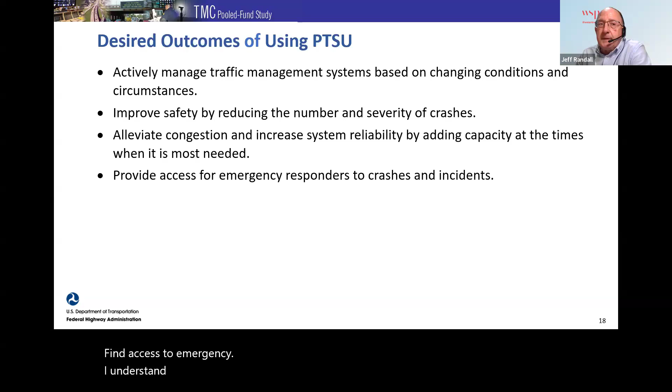Some key considerations when planning and implementing can include policies, procedures, and staff resources to support active traffic management and operations of PTSU. Operations staffing and scheduling to enable and operate the PTSU, operator position knowledge, skills, abilities, and operator descriptions needed to manage the part-time shoulder use operations. Next slide.

Agencies are challenged with a number of things when implementing it. Some benefits may vary from site to site, and it's really based on driver awareness of reasons to use the shoulder, driver behavior, and road geometry can impede that. Part-time shoulder use compliance may be low if restricted use is not enforceable. PTSU requires significant investment in field devices, traffic management system capabilities, staff, and support resources. Implementation may involve agency policy changes, operating procedural changes, additional staffing, and additional training for operator skills.

Next slide, please, Jordan. The engine that drives the operation and management of part-time shoulder use is the TMS. The TMS needs to have the capabilities and resources to support actively managing and operating the use of part-time shoulder use, performing functions including collecting and processing data, disseminating the information to travelers, emergency responders, and service providers, ensuring the shoulder is clear of obstructions prior to opening and while it's open, and monitoring the shoulder in real time.

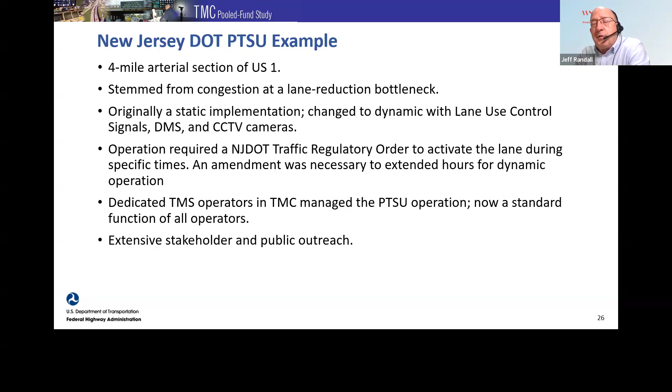Operation required a New Jersey DOT traffic regulatory order to implement PTSU. An amendment was necessary later to extend the hours when it went to dynamic operation. There were dedicated operators within the TMC initially that managed the operation, but now it's a function and role of all operators. They used extensive stakeholder and public outreach before the first implementation of the PTSU.

Michigan implemented PTSU along US 23 in Ann Arbor because they needed additional capacity during peak hours and special events. It did not require any policy or staffing changes when implemented.

Existing on-road maintenance personnel are used to sweep the shoulders to verify if there are any obstacles present, which might restrict use of the shoulders for traffic lanes. One challenge they experienced, as a northern state, was the timing of de-icing applications required for traffic to activate that. I think Chris will likely talk more about that.

Sorry, Chris, you're New Jersey. So the issue here is that traffic has to roll over the ice to activate it, so it's difficult when it's icy to first activate it. There's some danger because the ice is still present.

In Virginia, they've operated PTSU for many years, originally in Northern Virginia on I-66, but that's no longer in operation there as they've widened and implemented managed lanes. On I-264 in the Hampton Roads area, the shoulders open 2 hours in each direction on weekdays, and can be open when predicted or current conditions support those changes.

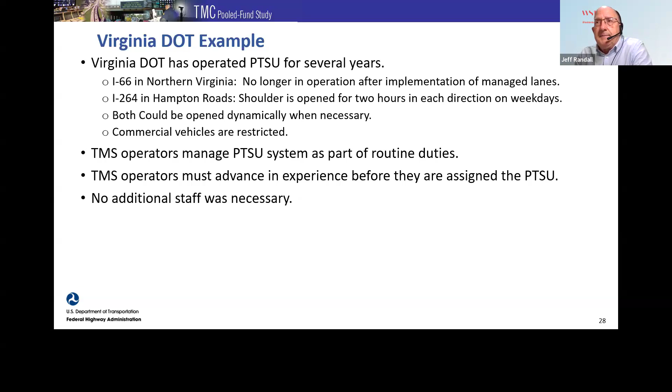Georgia operates along a couple of routes, State Route 400 and I-85 in the northbound direction. Like Virginia, they operate on a peak period schedule; however, they may also be able to activate it dynamically as needed. Buses are restricted from using the State Route 400 shoulder, and trucks are restricted from using the shoulder on both routes.

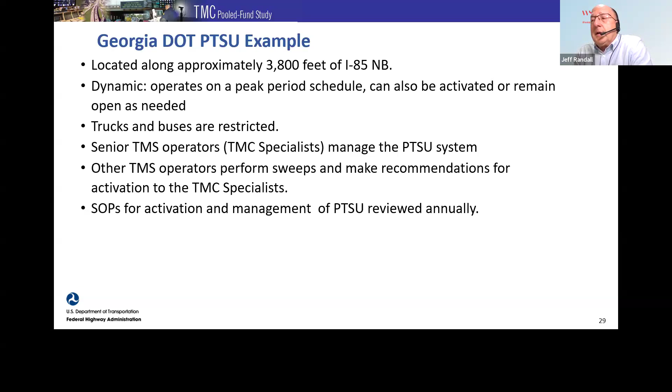Senior TMS operators here, called TMC specialists, manage the part-time shoulder. Other less experienced TMS operators perform sweeps of the shoulders for obstacles before making recommendations to activate the PTSU to those TMC specialists. SOPs for activation and management of their PTSU are reviewed and updated annually.

Lastly, Washington State DOT has implemented PTSU on various corridors, I-405 and highways 2 and 14. The operation is managed by their TMC. Washington State DOT recognized the complexity of part-time shoulders, so they've designated transportation engineering positions to manage this operation.

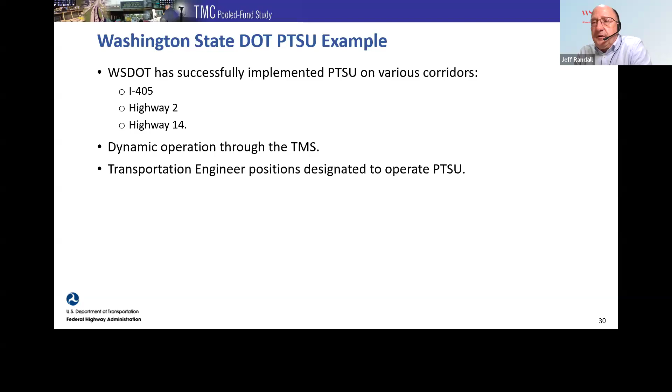So lastly, various lessons have been learned through these 5 DOTs in their implementation of PTSU. Dynamic PTSU, based on changing conditions, requires more staff than static time-of-day, day-of-week PTSU. Some agencies that initially used dedicated operators to manage PTSU found that dedicated operators were no longer necessary, and the management could be done by operators with appropriate training and skills. Because of the complexity of PTSU, agencies benefited from training these operators in traffic operations and traffic flow theory, much like a traffic engineer. SOPs and management plans for PTSU should be reviewed regularly and modified as necessary. And lastly, there's a benefit in examining whether policy and legislation needs to be changed in order to implement PTSU early in the planning process.

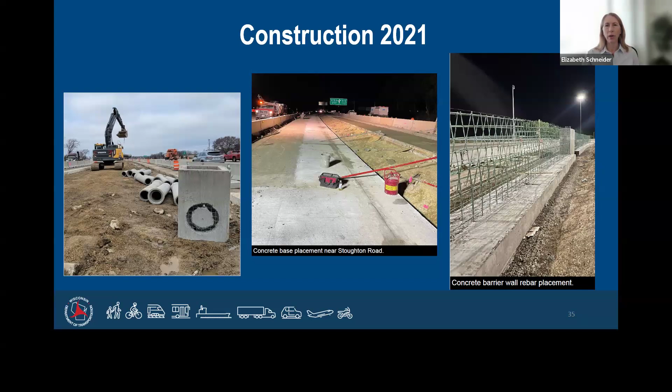Next slide, please. We'll talk a little bit about our operations and our policies - for example, when, where, and how to close the flex lanes. Could we open and close them partially, and how would we do that? What would be the traffic thresholds for opening and closing? And then how would the software support these procedures? These were all things that were in the works as the design and construction were underway. One thing we decided was that simultaneous sweeps by the traffic management center's operator - who we also call a specialist - and the freeway service patrol deputy are part of the standard morning and afternoon opening processes.

To predict operating times, we developed speed tables, created for every month of the year, using data from the National Performance Management data set to map out the speeds. This helped show us where traffic was increasing earlier along the corridor, and which areas we needed to place detectors to capture those increasing traffic levels. One of the things mentioned in those federal guidelines is that they hope states can identify when traffic is starting to increase and start monitoring that increase in demand to get the lanes open, because that time to open the lanes is not instantaneous.

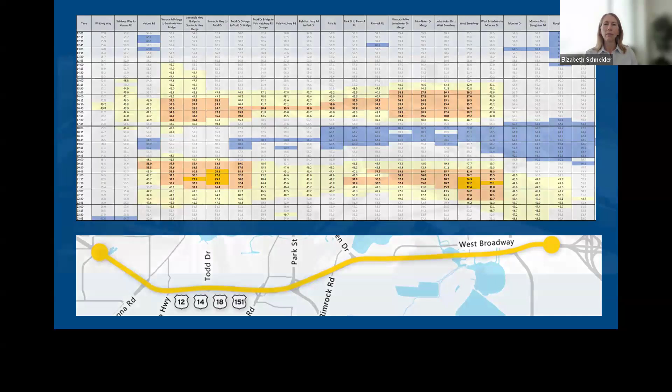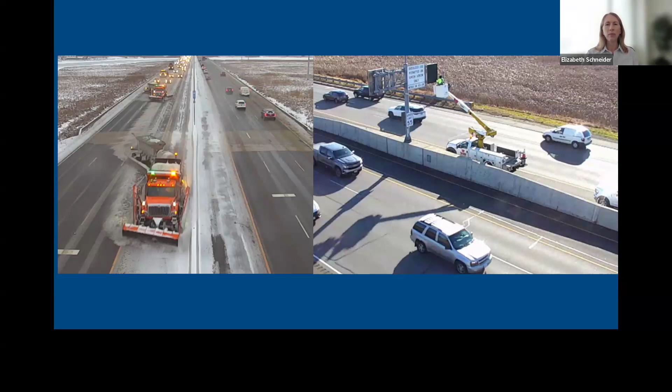The lanes were narrowed, and the flex lane itself is only 10 feet wide. In the months leading up to opening, law enforcement was asking how we would enforce the no-truck policy. Originally, the signs mounted over the lane simply said 'no trucks.' About three weeks before opening, we swapped out the signs with a less ambiguous message so it would be enforceable.

Operations are impacted by incidents most often. We also have a handful of other things that influence when we have to open and close the lanes or shut it down, including outages, different types of weather issues, and emergency maintenance. For the most part we've been a little lucky with outages, which have mostly happened on weekends or in the middle of the night. Because our TMC is 24/7, the overnight shift can recognize when there are outages on the flex lane and call in for service, so we can get contractors on site even before we open in the morning. Just a handful of outages have impacted our operation.

There are a lot of agency resources needed to manage this, and here's a few we actually manage out of our traffic management center. Our statewide TMC is in Milwaukee, under the Bureau of Traffic Operations. The regional office holds the contract for the highway maintenance department, which assists. Out of this bureau, where we operate the lanes, we have a contract for our TMC operator positions, a separate contract for ATMS software development, on-site support, and ITS maintenance, and another separate contract for the freeway service team, which is dedicated just to this corridor and staffed 6 a.m. to 6 p.m. on weekdays. We also had a performance measure contract in the beginning, but since then we've brought that in-house, so we didn't continue with that contract.

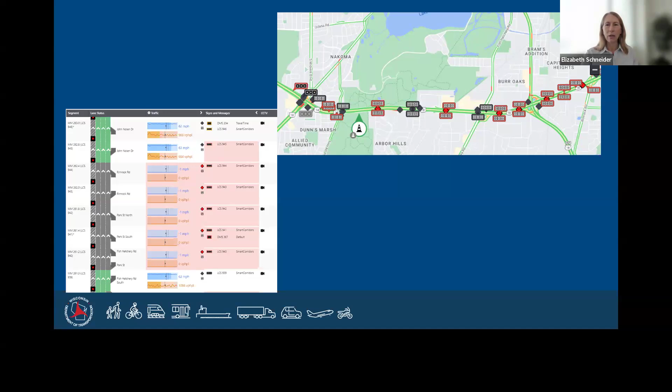The media is a really important partner with us. WisDOT has public information officers, which helps us provide a consistent message, since we've done media interviews on site in Madison and in our traffic management center, as well as radio interviews and a lot of print coverage. The city of Madison and their media have been really active in keeping the public informed, so it's been a really good partnership. The DOT also has a web page with videos instructing how to drive the flex lane, a frequently asked questions section, and other good user information.

I wanted to talk a bit about this: the closing of the eastbound flex lane. Per guidelines, we have two red X's at the end of the lane and two yellow X's indicating that the lane is closing. What was unique here is that it's on a curve, a horizontal curve and a slight vertical curve. This was modeled as it could be an issue with merging design. Just off the right side of this picture is the left-hand on-ramp to an interstate, so this was modeled carefully.

Let's go to the next slide, please.

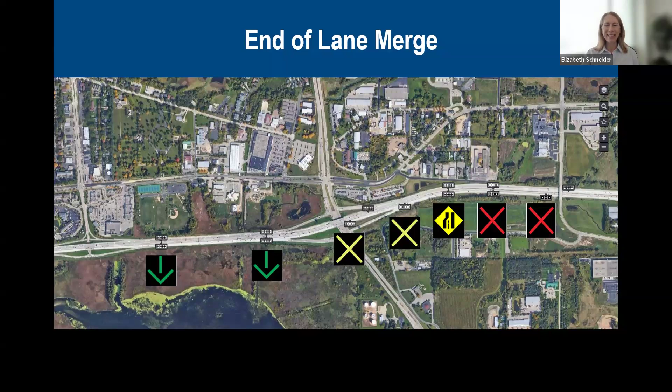Recognizing the severity of the merging issue we had in this area, within just weeks after opening our flex lanes, we swapped out some signs and added some pavement marking. We had done the design per standard and recommendation, but we decided we had opportunities to beef it up and give drivers more advanced notice. This was an issue we realized and made changes right after opening.

Some other things that came up right after opening were recognizing our operating times. We did a lot of fine tuning on our operating times. We had events planned for this corridor - UW-Madison has the Wisconsin Badgers, who play home games in the fall, so we have openings on weekends and staff on the weekends. Over the last couple of years, we've learned a lot about managing these events.

Another issue we've tackled, which was mentioned earlier, is the certification of operators, training operators, and having backup operators. We have 2 dedicated specialists for operating the flex lanes during the week, but all operators are trained. Having had a good couple of years now, we've actually started to launch a recertification training for the backup operators.

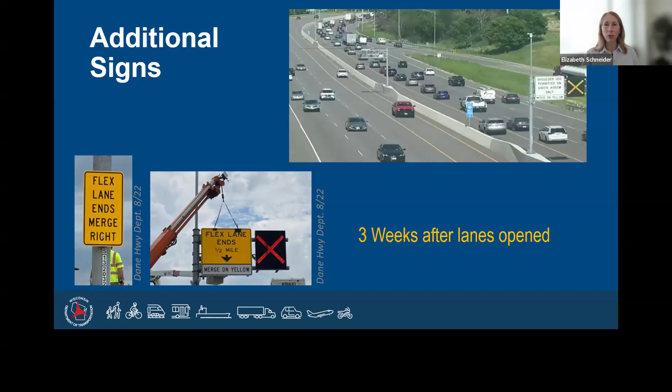One of the biggest questions we get from the public is, why aren't the lanes open all the time? We have some public comments thinking it costs us more money to keep the lanes open. At the same time, some people have shared that it's really safe to have that shoulder there. The lanes are closed for safety - they're only open when needed. So we try to get these messages out to the public. Having those shoulders there for a runoff area is really a safety feature of the whole corridor.

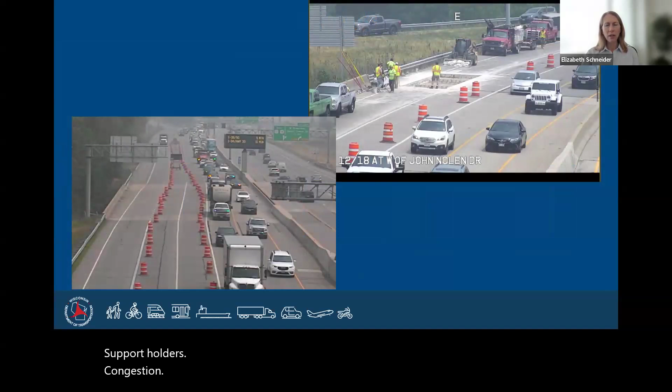This is just an image from where we were able to keep the lanes open. I think this was almost a 20-hour accelerated construction repair, and we were able to keep the lanes open for the entire day to really hold off the congestion, so it was less worse than it would have been.

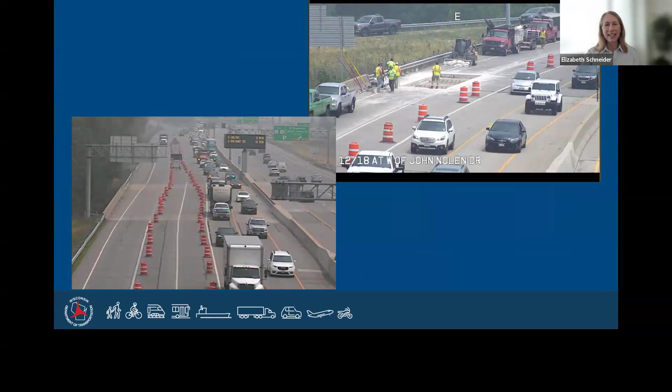And then during incidents, right - if there's a crash or something happening on the right lane or right shoulder, we can open the lane. But it's important to recognize that we keep the shoulder closed so we can provide a lane for first responders to access crash scenes. That's something we have to assess really quickly, with communication between our control room operators and the responders in the field. Once we get that approval, we can open the flex lane to get traffic moving again.

Next slide, please. One other nice thing we've been able to do is provide corridor status on our traveler information page, our 511 page. This was not initially launched, but was a 511 improvement after we had the lanes up and running.

So a few lessons learned. The speed differential was definitely something we realized once we opened an additional left lane - the left lane's a fast lane, so we had a new left lane which became a faster lane. Dealing with the speeding out there has been something the agency continues to work on, continuing enforcement and getting the message out about safety.

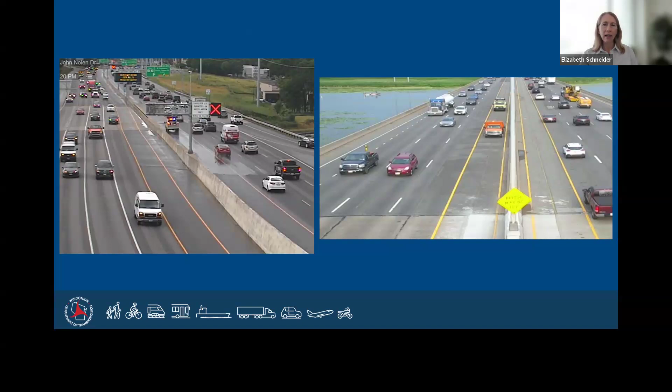It is a truck restricted lane because of the width, so we do not have heavy vehicles or trucks in that lane, which tend to also slow down traffic. Our software support has been very high - we have on-site support, and we've had software updates over the last few years which have brought additional features to our operations out here. Next slide.

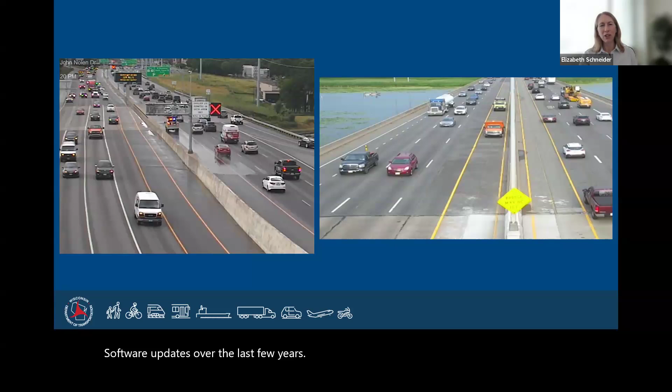And that's all that I have for you guys today.

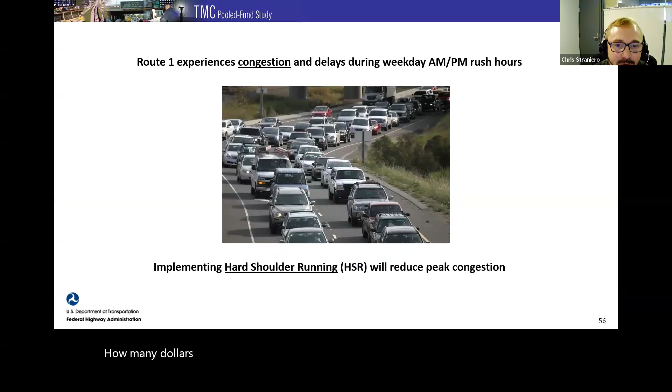Obviously, a lot of us have experienced this. Route 1 had quite a bit of congestion and delays during the AM/PM rush hours. So naturally, we look towards hard shoulder running, that's the name of our part-time shoulder use, to reduce that peak congestion.

Our HSR allows vehicles to use the shoulder as a travel lane. This will be for certain designated hours, which we have at 6 a.m. to 10 a.m. and 4 to 7 in the p.m. Obviously, we're going to let the shoulder be closed during off hours as it's a safety lane, right?

HSR adds a lane without a need to widen the road. HSR was successfully piloted just south of the project in 2017 along Route 1 from Independence to County Route 522, which is Promenade.

So we actually have already implemented this in 2024, the add-on to the HSR, which started at Promenade and made its way up to Erin Road, which was in North Brunswick. So far, it's pretty good.

We have portable VMS signs out there to alert the public of upcoming shoulder usage and when it becomes terminated. This differs in a lot of ways from the original piloted program, from the original 4 mile that Jeff brought up earlier. This is an additional 3 miles taking us into North Brunswick.

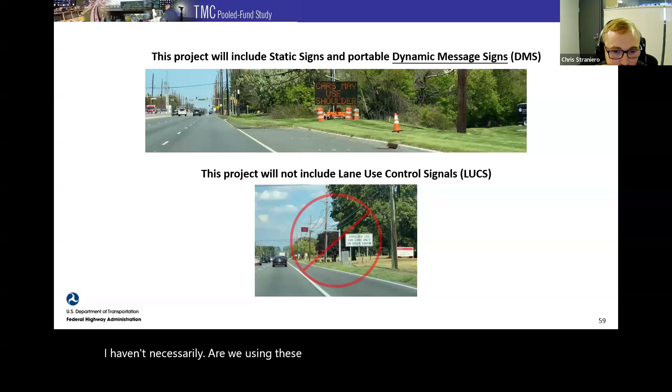As I mentioned earlier, we're using these portable VMS to alert the public, not like the original, which has become permanent, which is the overhead signs with the lane closure indication with the X and the green arrows.

In addition to those portable message boards, we'll have extensive use of static signs to alert the public of current use, upcoming, and the end of shoulder use.

This will give the public a heads up on when they're permitted to use the lane by law, so there's no confusion.

Also, we have people that may be out of town, may not be familiar with what's going on. We have to give them a heads up when they're coming out of a shoulder because it's a great hazard. This is the greatest threat of a T-bone, is someone that doesn't know a shoulder's in use and they're coming into a live lane of traffic. They think they're safe, but we've set these signages in the areas of greatest threat.

So it wasn't as easy as just throwing some stripes down and opening up the shoulder, right? So we had to expand the right shoulder from 10 to 12 feet. But how do you do that with a highway that's set in length? Well, we had the left shoulder shrink down from 3 feet to 1 foot, so we were able to add to the right shoulder's length.

Obviously, we had to beef up on some of those shoulders. They were soft, so there was a lot of nighttime operations, and we had to raise some of the drainage and inlets so everything was up to par. A lot of raised pavement markers were implemented to get this project functional.

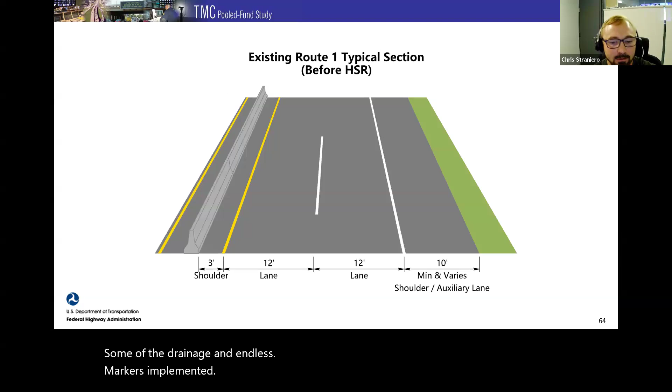Here's a visual of how everything shifted over. It'll show now how we have 3 lanes of 12 feet, so we're able to have traffic flow through there. This is Raymond Road, kind of a before and after shot.

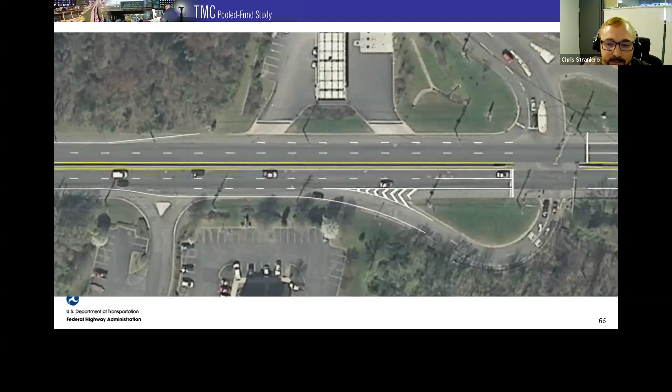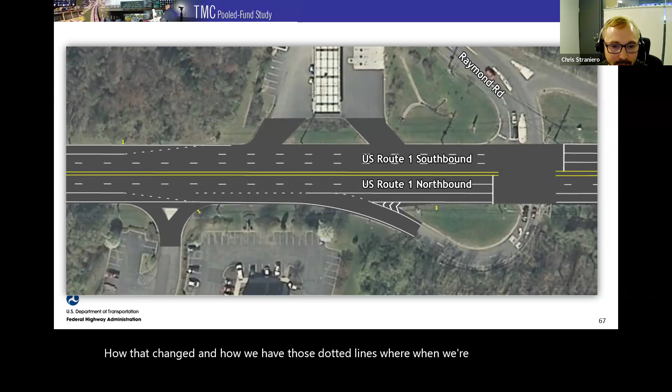Here's how that changed, showing how we have those dotted lines where, when we're in shoulder usage, you can flow through those dotted lines. Whereas if you're not, that is a shoulder, that is a decel lane, right? So we can get to those ramps.

So I have a video here of the activation of the HSR in the afternoon. We can go over that now. You can see it's a smooth transition - the green arrows come through, the motoring public picks up on that. They know that it's time, and it's a legal time to ride in the shoulder, and we've just dissipated the volume of congestion during peak rush hour.

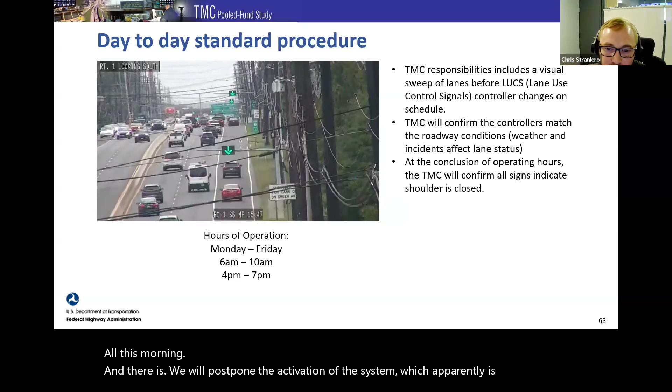So here at the STMC, we're responsible for visually sweeping those lanes. As part of this project, we were given quite a bit of video cameras all along this corridor. So we will look north, we'll look south, we'll make sure that there's nothing in that lane of travel. And if there is, we will postpone the activation of the system, which currently is on a schedule for the South Brunswick section, the 4-mile length. Once we know that the lane is safe, we can open it up.

Obviously, and we've chimed this on some of the other speakers, weather can be an issue. So when I'm supervising, I like to stay in touch with the Central Regional Emergency Operations Center to make sure that our crews are plowing those lanes. And once we know that it's safe, we will activate this system.

And obviously at the conclusion of operating hours, we want to make sure that those signs go back to the red X, right? Because this is a law. We don't need people saying, oh, we're getting notified that the lane is open - well, that can't happen. So we kind of crutch on a scheduled system, but we have to verify that the system is going back to closed.

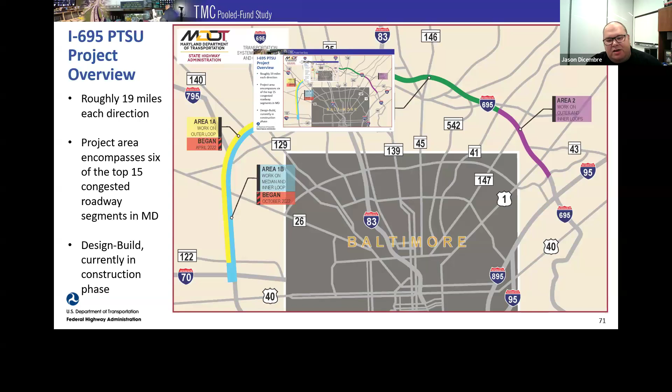Part of the need here, you can see, especially on the evening rush hour side, just a ton of congestion around this upper west side where I-70, I-83 is coming in. And so this particular corridor, there is not much real estate at all available to expand, even if we wanted to. So when it comes to treating the mobility problem here, PTSU was really the only viable solution.

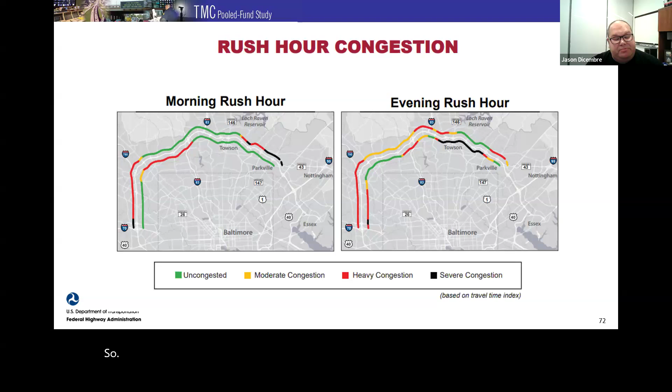But we weren't just focused on mobility. When we developed the project, we really, like any good ITS project, sat down and figured out what our true goals are here. So yes, we wanted to improve mobility, but we also didn't want to lose sight of safety, right? Safety is always the first priority. How can we marry the two?

We did want to maximize hard shoulder running, again, to increase that throughput there. But we also wanted to do it in such a way that it didn't tax the SHA operations and maintenance crews too much. And I'll talk a little bit about the implementation again in a second, but we also didn't want to limit the technology to what we currently use in Maryland.

So I mentioned that this is our first implementation of dynamic part-time shoulder use. It's not the state as a whole's first implementation of dynamic lane control. Our sister agency at the Maryland Transportation Authority already uses lane control systems actively through their TMCs on the Bay Bridge and in their tunnel facilities.

But for the State Highway Administration, it is our first foray into this area. We didn't want to just look at what MDTA currently used. We wanted to allow industry to bring some innovation to the project, which led to that design-build decision. We also wanted to increase reliability along the corridor and have the ability to respond to non-recurring congestion issues.

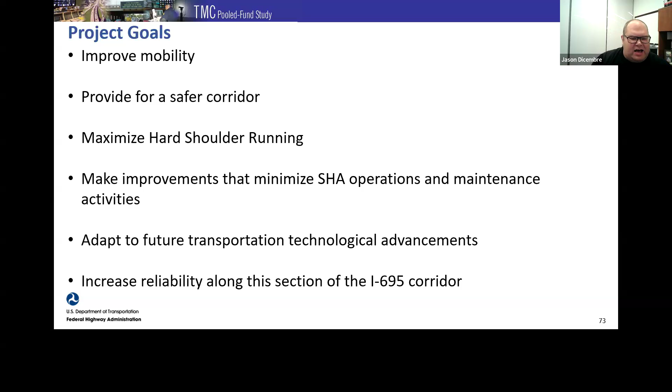The project did require complete CCTV coverage of the PTSU segments, so we will be getting new CCTV cameras in addition to what we already have, plus some automated incident detection. There was a lot of discussion in the formation of this project about what that green arrow means legally and to the public. Does it mean safe for travel, permitted to travel? What's the public perception, and how do we make sure that lane is as safe as possible to use when the public is used to thinking of it as a shoulder?

So there is automated incident detection. That is going to be radar-based, not camera-based detection for us.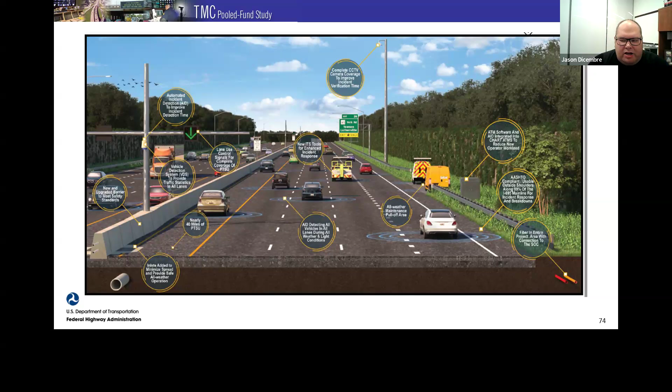The other thing we were able to do through this project was introduce fiber. In state highway's coverage area in Maryland, not all of our devices are connected to fiber. So this project gave us the ability to lay some new conduit and make connections to some fiber runs that were already there, because with a regulatory system like lane use control, we want to make sure the uptime there is as best as it can be.

Next slide. So some high-level lessons learned. I'm going to take three examples from our ConOps and high-level requirements we were developing, and some of the conversations we had, plus some lessons learned so far from our build out.

The first is that the PTSU had to be able to be open or closed at predetermined times of day. Those times of day were determined through RITIS data, and also through some VISSIM models we did for current and projected conditions. I believe it was 2040 VISSIM models that we used to come up with those times.

But we wanted the ability to open or close these lanes in times of emergency, whether that was the PTSU lane being blocked or needing to open it, as Liz was showing, for incident management capacity building for accidents happening towards the right side of the roadway.

We needed to make sure it was compatible with our existing ATMS, but we didn't necessarily want to limit industry to having to use our ATMS. That was an interesting discussion. Part of that related to time to implement and actually build out our system, but we allowed industry to bring items that we could integrate with, not necessarily make it a module within our own existing ATMS, and I'll touch on that later.

And then, as I mentioned, an automated incident detection system that we felt was required for the safety of the system. So let's talk through each of these in the next slide.

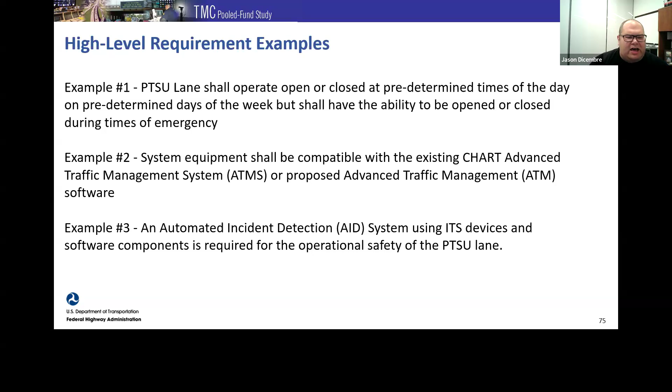For the opening and closing, right? There are four big things we were really talking through with this. How do you open or close the system dynamically?

When it comes to crashes, our current practice is to move the crash to the closest shoulder possible to get those lanes open, get our responders out of the roadway, and get traffic moving. In cases where it might be a long-term incident, we may sometimes use the shoulder to run traffic or release trapped traffic, but we don't routinely use the shoulder for constant movement of vehicles.

So we had to talk through, how does this work now? What about the accidents that our SHA teams aren't on scene of? As we start going through traffic incident management training with our other partners, especially in the Baltimore area, we're emphasizing that once the system is active, we need a concerted effort to, where possible, move vehicles off to the right and not the left. But that could mean needing to hold traffic temporarily while we quickly move that over where possible.

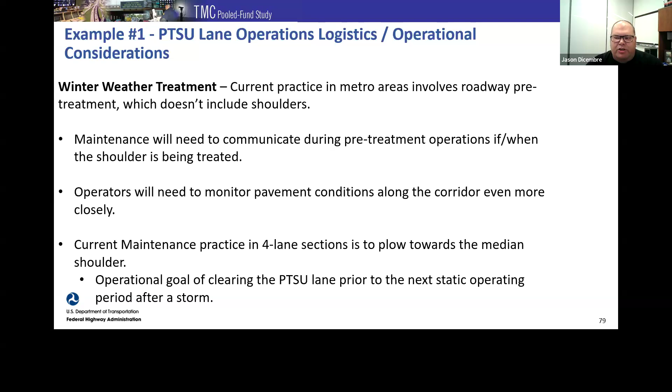So then it just turned into, okay, we'll continue to plow to the left, but after the storm is over, we'll just make it a priority and a goal to clear the PTSU prior to the next activation period after the storm has ended.

Really quickly, a few other things touching on the other examples of ATMS compatibility. Our ATMS had never done any type of lane use control. MDTA, through their tunnels and bridges, use a whole separate system to control those. So we had to build that functionality inside of our system, and there was a lot of discussion of how do we do that and how do we visualize this to the operator.

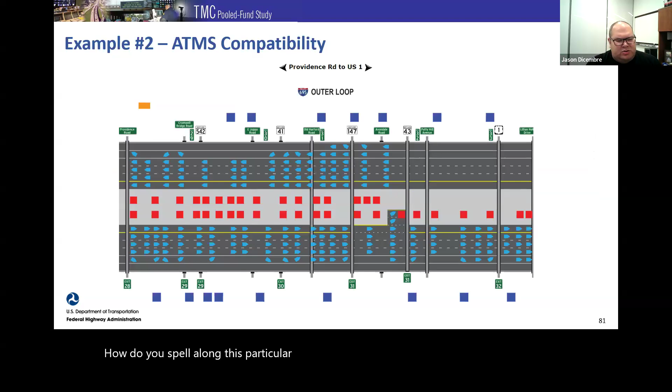The operator can then click a particular segment and they'll get a lane-by-lane view that'll show the current speeds - those are the blue indicators you see there that show the speeds in each lane. We're still building out the graphics, but in the middle you'll be able to see the current status of the LUCS at each gantry. Then some visualizations will be built for all the cameras in the area or all the dynamic message signs that they could also see.

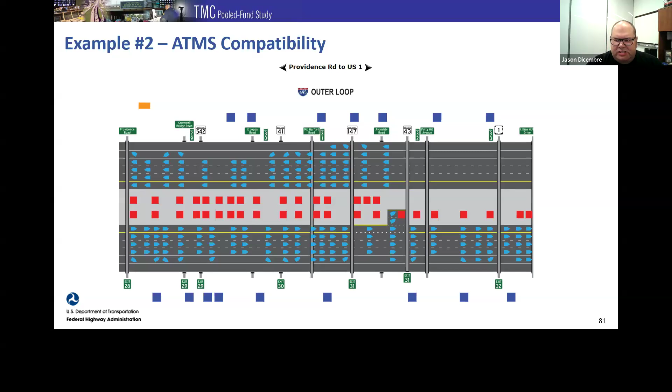The last thing was the fact that it is a new system - we had also never done in-state highway automated incident detection. So the RFP required a 10% or less false alarm rate. Now, my background is in TMC operations, so I read that and I'm thinking that's still a lot. But how do we put a number in there that the industry could meet and wasn't limiting? It goes back to that balance.

In talking to the winning bidder, we've been told that the false alarm rate will be less than 3%, which is a lot more manageable. A little bit on how to operate those.

The current SOP will not automatically close the PTSU segments once the AID alarms. It requires an operator to verify that the alarm is valid and that there is an obstruction, and then manually close that segment. The reason for that is, again, not really knowing how many false alarms we're going to get - we wanted to limit any chance of weaving that would happen of segments going off, operator clears the alarm, segments back on. So in the interest of safety, preventing the weaving motions of merging, we'll let the operator verify it first, and then if we need to make that adjustment down the road, we will.

As far as the schedule time, once again, the current design does not automatically activate the PTSU at the designated time.

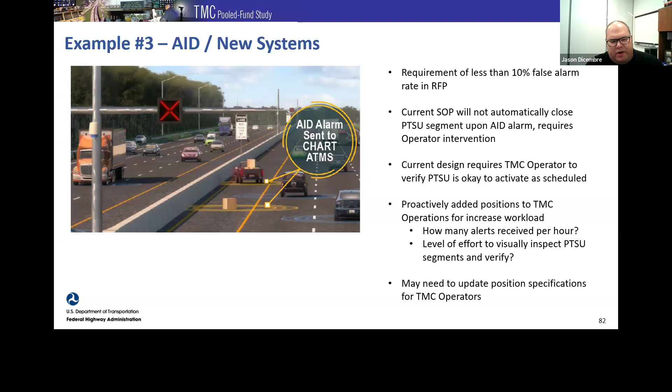Next slide, which is my last. So, some high-level lessons learned. First: sell the why. There was a lot of discussion at the beginning of this project about whether it needed to be dynamic or whether static would work.

Ultimately, that flexibility of being able to open and close it based on conditions and incidents was important, and also the ability—like some other states have done—to add more traffic sensors and go full dynamic eventually if we wanted to. Let's build that capability in now.

Ensure you have a well-developed ConOps, especially in your operation scenarios, making sure everyone is there. Liz mentioned law enforcement—we had the same concerns from law enforcement and especially EMS about crossovers, because some of the crossovers in the segment are being taken out. Making sure they're part of the discussion, and how we manage these changes together across different scenarios, is really important.

Provide enough time, especially in your software development, for any changes you need. Yes, you can agree to interface control documents between systems, but seeing it on paper versus actually connecting systems and seeing the glitches that inevitably happen—you need to build time for that. In our experience, it sometimes takes even longer than we anticipated.

We think it's smart, as some other states have done, to make sure your staffing is in place long before the system goes online. Do you overstaff and then adjust down in operations? My opinion is it's easier to scale down than scale up. So start with a large group in place, and you can reassign them to different duties if needed, but make sure staffing is there before your system goes online. We think we're well adjusted for that when we flip the switch here.